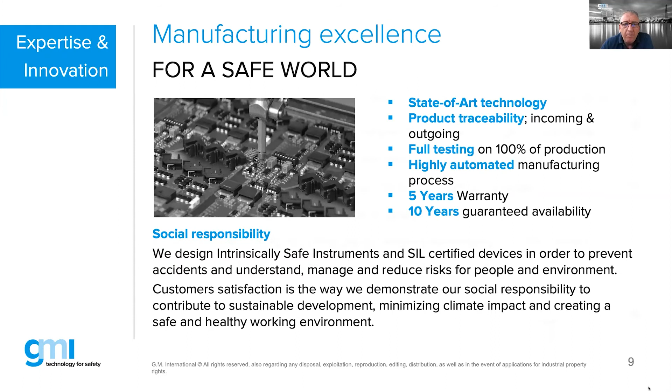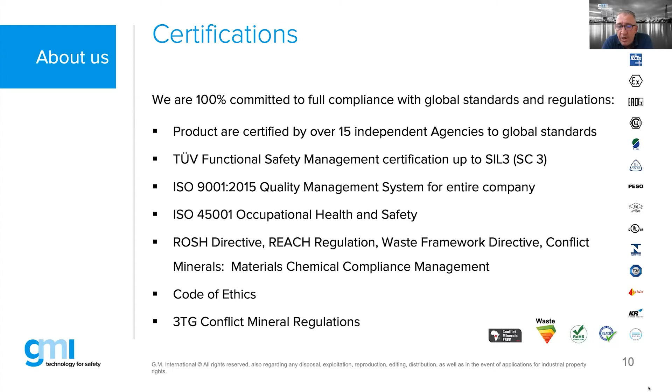Last, it is not a product itself, it's not hardware, but it is a service that we provide to the market. I'm talking about functional safety courses, cybersecurity training, as well as consulting, which, when we talk about functional safety, is executed together with TÜV. So if you are interested, we can also have a deeper discussion on that.

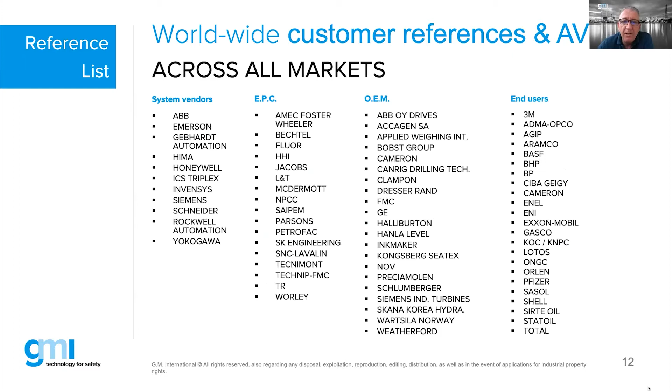Of course, it is not extensive, it is just an indication.

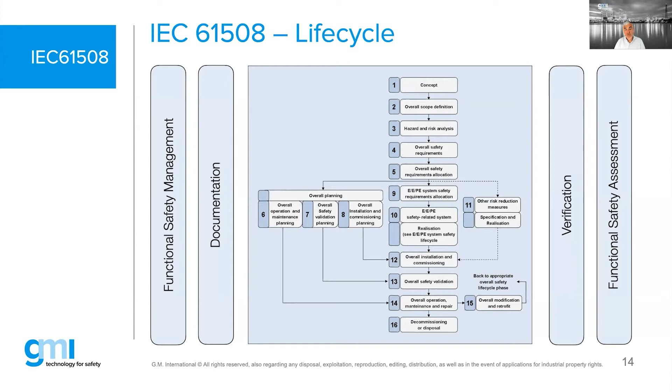So the topic that I selected for today will be handling somewhere around here, coming from the safety requirement specifications into the real design of both the hardware and the software of a device. When you hear the 61508, it's clearly the standard handling the E/E/PE systems, standing for electrical, electronic, programmable electronic safety-related systems, which is the standard that manufacturers such as GM International use to prove compliance to the standard of functional safety.

What is hardware safety integrity architectural constraints? As we call it, typically the hardware architectural constraint. We typically abbreviate that with the term HFT, and HFT stands for hardware fault tolerance. The highest SIL level that you can achieve for any safety function will be limited by the hardware safety integrity constraint expressed as an HFT. The newest edition of the 61508 is still edition 2 today. Edition 3 is coming, but it's not released yet. So we're still working with edition 2, which was released in April 2010.

And HFT, if you want to express this very simply, you have to ask yourself: how many dangerous failures can your safety loop tolerate and still achieve your safety function? So HFT is expressed as a number. HFT equal to 0 means that type of architecture cannot tolerate any dangerous failure. HFT equal to 1 means that the architecture of that safety loop will be at least redundant, so one of the two redundant partners can have a dangerous failure and you can still achieve the safety function.

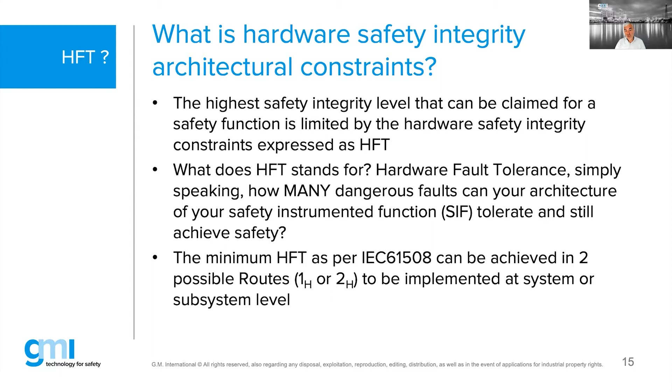The minimum HFT, as per the 61508 standard, can be achieved in two different routes: we call them Route 1H or Route 2H. But they mean totally different things according to the standard. I find that people typically jump on one of the route selections without knowing the preconditions to fulfill before they are allowed to choose Route 1H or Route 2H. The purpose of this webinar today is to give you some indication and summary so that you will know at the end of the day which route is meant to be used for the architecture of your safety loops.

In the title here, between the brackets 7.4.4, for those who are more the specialists and the experts listening to this webinar, that is actually referring to part number 2 of the 61508, which is indeed the hardware section of the 61508 standard of the 2010 release.

And if you would go to item 7.4.4, there you will see that the hardware safety integrity architectural constraint is explained in 2 routes. Route 1H will be based on a hardware fault tolerance table, which we call the HFT table, together with the safe failure fraction, which we call the SFF. And the safe failure fraction is a percentage of how many dangerous undetected failures are hidden away in your architecture or in your subsystems.

That is the concept known since 1997, edition 1, because edition 1 of the 61508 was using only that route, and only that solution was the way you could choose if you were selecting your subsystems. And in 1997, we used to call these type A or type B tables, which are still today called table 2 and table 3. Table 2 will be for any type A subsystem, and table 3 will be for any type B subsystem.

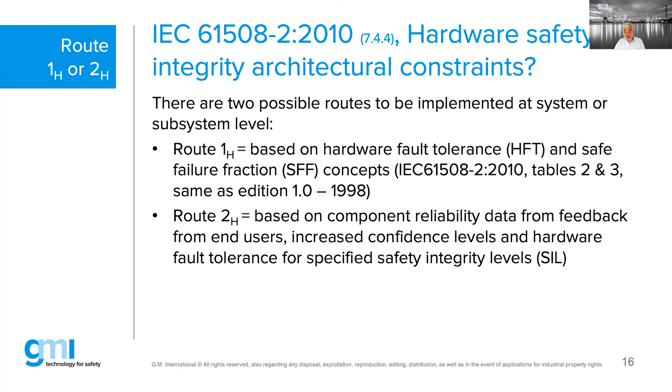And the proven in use is actually from an increased confidence level, where they will show, based on two standards, how the manufacturers have to collect their field feedback from the install base, and based on that table you can claim route 2H. But I have a summary later on with a table that can show you more details.

First of all, I have to find out from the manufacturer whether the subsystem has been designated type A or type B. If you have a type A subsystem and they have given you a safe failure fraction, which is typically an indicator in percentage, it will be mentioned in your certification papers. So if they have made an assessment on the system leading to a certificate, that will also mention whether it was a type A or type B system, and they may also have given you the safe failure fraction. If not, it will definitely be in the safety manual of your compliant device if it is a 61508 compliant subsystem that you are using in your safety loops.

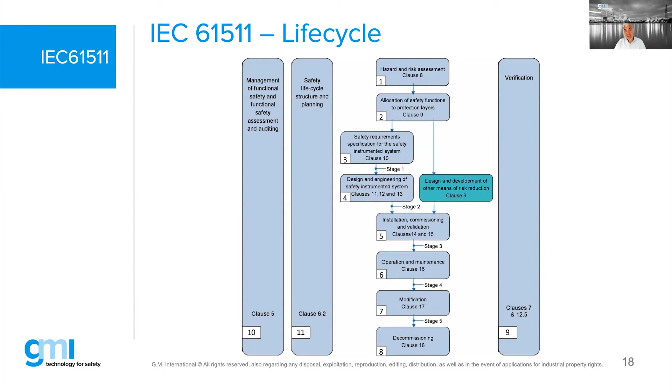If you have a requirement coming out and saying we want to build a SIL 3 loop, but we do not know yet what type of subsystems or what type of equipment we're going to find on the market, well, then the HFT will be decided here in your phase number 4, because there intentionally you will try to achieve a SIL 3 compliant design. That means then you will have to decide how many of those subsystems will I have to use in order to comply to the SIL X requirements.

So if I go more into detail, here again we have this route 1H and this route 2H, but in the 61511 edition 2, which is 2016-2017, if there would be someone from the US region, which I doubt because of the early morning session here in Europe, but if there would be someone here referring to the ISA 61511, then it is a 2018 release back in the USA. It's still the same reference. It's still 11.4.3, which is from the normative section part 1 from the 61511 edition 2.

There also we are calling it the hardware safety integrity architectural constraint, and there we have the same expression called HFT. But here the SIS, or the safety instrumented system, shall have a minimum HFT with respect to each safety instrumented function it will implement.

And when you can actually split your safety instrumented system into independent subsystems, for example your sensors, your barriers, your isolators, your safety relays, your logic solver, final elements, etc., well, then your minimum hardware fault tolerance can be assigned to every single independent subsystem level.

But the 61511 edition 2 approach was different than what we were doing in the 61508 edition 2, because the edition 2 of the 61511 prefers the prior use. And mind you here, we're not calling it proven in use, we call it prior use. So there's a difference. We distinguish between prior use from the 61511 versus the proven in use from the 61508. They both have the same principle. They both require quality feedback data or failure data from an installed base.

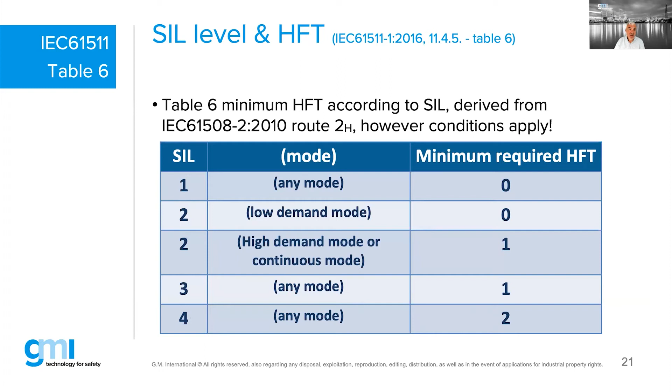For any SIL 3 that you may have out there, it's always a redundant HFT 1. And if you would decide to go for a SIL 4, which is recommended not to use, then you would go to an HFT equal to 2. That means you will have to have a minimum 1 out of 3 in your configuration, or a 2 out of 4.

Right, Mauro, we have the first poll question to see how much attention we generated in the previous slides. The question is about the architectural constraint table 6 as per the 61511, and only one answer here is the most complete and the most correct answer. So that's a little bit like we are doing our exams on the competency reviews. Answer A: can use either method 1 or 2 or 3, but only one method per safety instrumented function should be used.

Answer B: can use method 2 and method 3, both based on route 2H, mixed per safety instrumented function. Answer C: can use only route 1H when claiming prior use for the 61511. And answer D: you can mix per SIF method 1, 2, or method 3, all as applicable. Which one do you believe is the most correct and the most complete answer here? Okay, let's give some time to answer.

I see. Yeah, we need some more interaction. We have a minimum threshold of clicks that we need to see. Otherwise, I will go on strike. Because it's a moment of strikes again in all the airports here in Europe. So we are getting used to the word strike again. Before it was Corona, now the new word is striking. Please provide a few more clicks so that we can close and share the results.

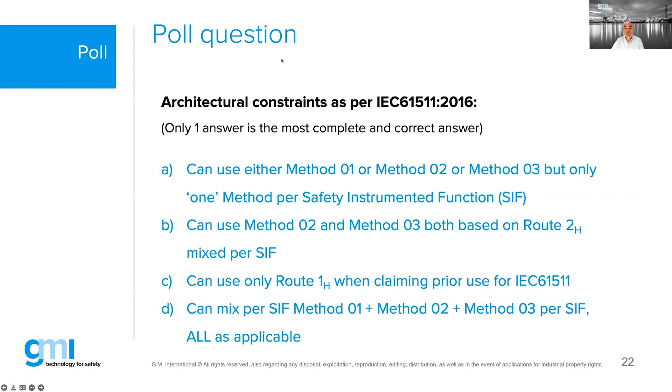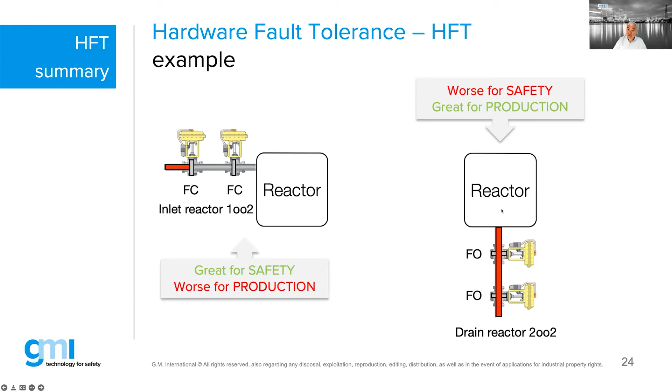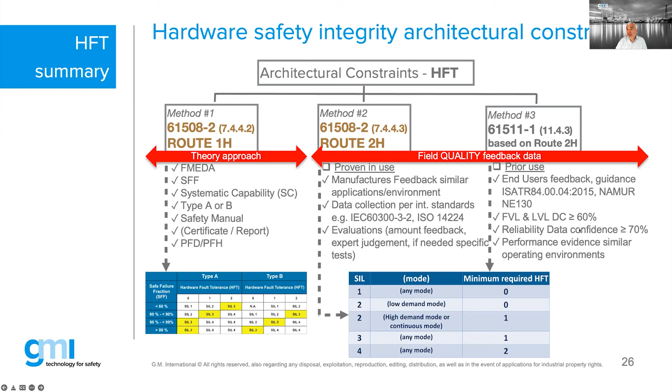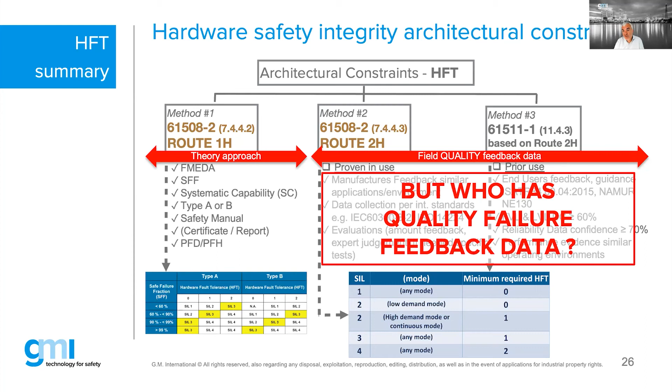The other conditions will be that full variability language and limited variability language need to have a diagnostic coverage of more than 60%. Here you have to have a confidence factor of more than 70%, plus you have to prove performance evidence in similar operating environments. The problem will be who will have quality failure feedback data to comply with Route 2H, either in method number 2 or in method number 3.

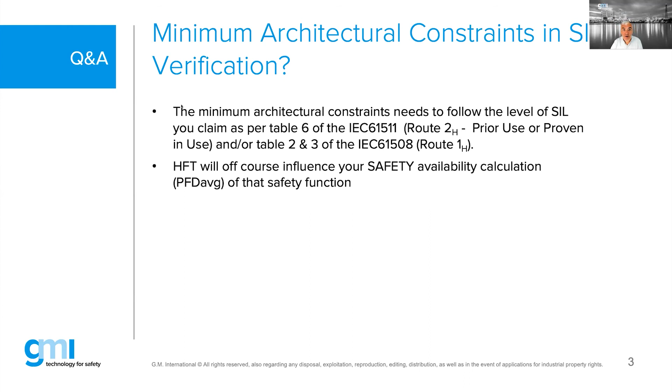Okay, Mauro, let's move on. So, we answered this live, so this is done.

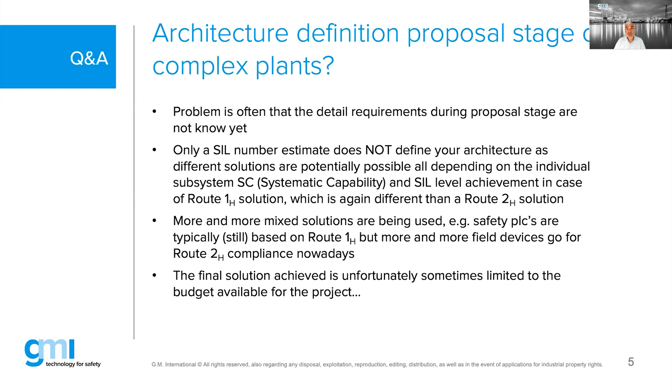A second answer that I can give to this: if you mean the frequency given by a manufacturer on Route 2H proven in use, then the same answer, yes, you can also use those frequencies. So in summary, I can use Route 1H or Route 2H frequencies, providing the frequencies are accurate. I can use them in a SIL calculation to predict the reliability of that safety loop. Okay.

The other question that I collected: when do we need to use IEC 61511 and IEC 61508 based on the project scope? Well, end user operating company projects for the process industry will first, as a preference, try to use 61511 table 6, which is Route 2H, the prior use. However, many subsystems that you will find on the market will be based on the manufacturer-specific functional safety standard, which is 61508, Route 1H, or sometimes Route 2H, proven in use from 61508 itself. At the end of the day, all projects will mix both Route 1H and Route 2H, as we mentioned before, based on the availability of the type of subsystems.

The good news is that the minimum HFT 0, the minimum HFT 1 or the minimum HFT of 2 remains the same, regardless of whether you select Route 1H or Route 2H.

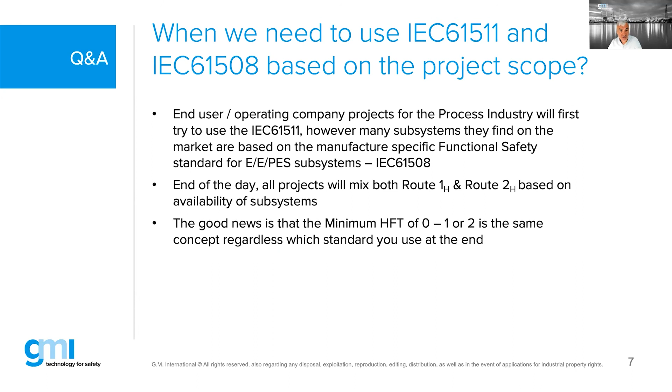I think, Mauro, I should be given an award. It's probably the first webinar in history that I actually finished on time for you. Yes, that's true. One minute before, just time for the last question. So maybe I'm getting proven in use now in doing webinars. Yes, true. I'll take the time while people are answering.